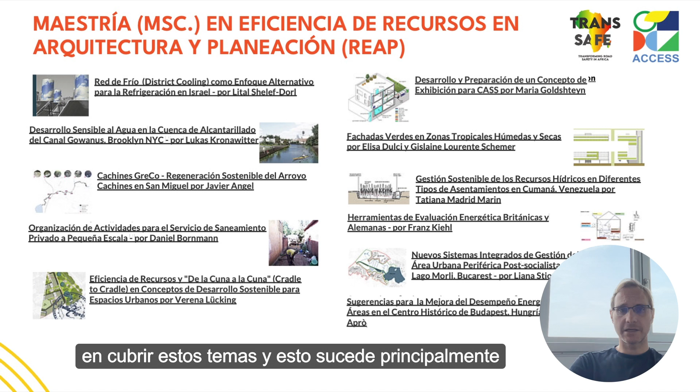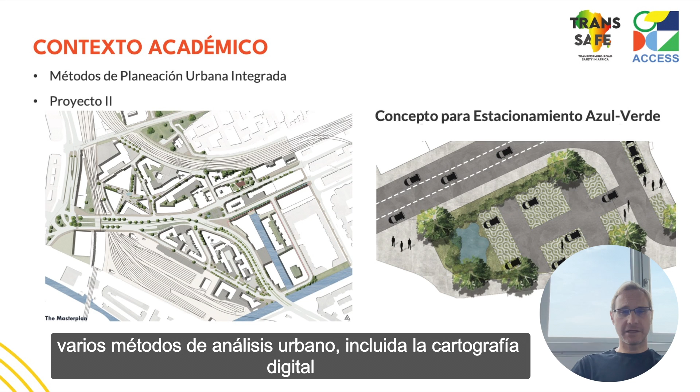But we specifically want to put an emphasis on covering these topics, and it happens mainly in two courses. The first one, Methods of Integrated Urban Planning, provides an opportunity for the students to really familiarize themselves with a variety of options in planning, including various methods for urban appraisal, including digital mapping.

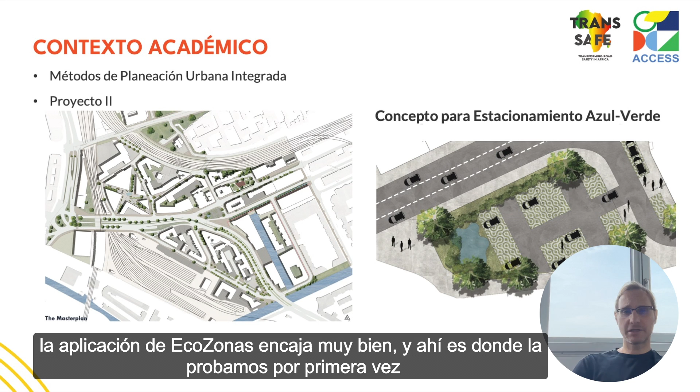So that's where EcoZones app fits very well, and that's where we actually tested it for the first time last year in 2024, when it was still in the development phase. We would surely use it in the future to help students familiarize themselves with the process and the topic.

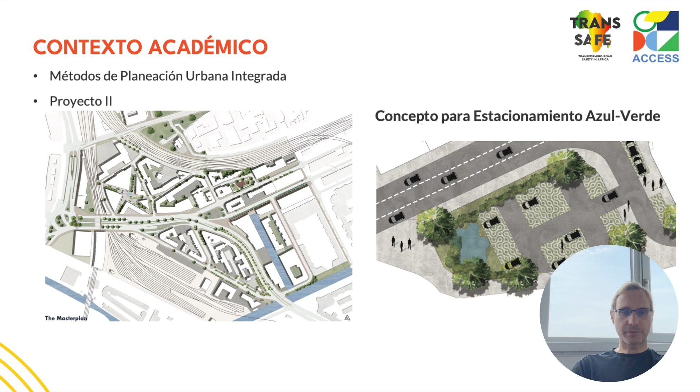Second, we also use it in project work, for instance in Project 2, which concentrates on the development of a project conceptualized by students in a specific district of Hamburg. Mobility and road safety in many cases is at least analyzed, but sometimes is even a part of these projects, and the whole process involves walkability analysis in specific districts.

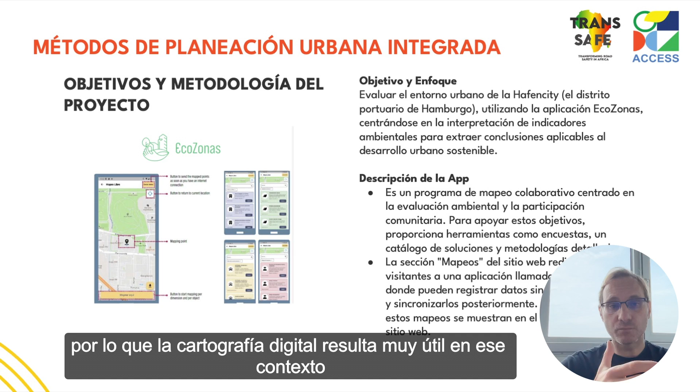So again, digital mapping comes in very handy in that context.

So what I wanted to do is just very briefly show you how one group of our students familiarized themselves with the app. They didn't really use this kind of tool in the past, so while testing it, they not only approached it from the perspective of results, but also wanted to get a sense of the broader meaning of mapping in an urban environment, and reflect a little on the whole process, not from an outsider's perspective, but zooming in and reflecting also on the utility of the approach for their goals.

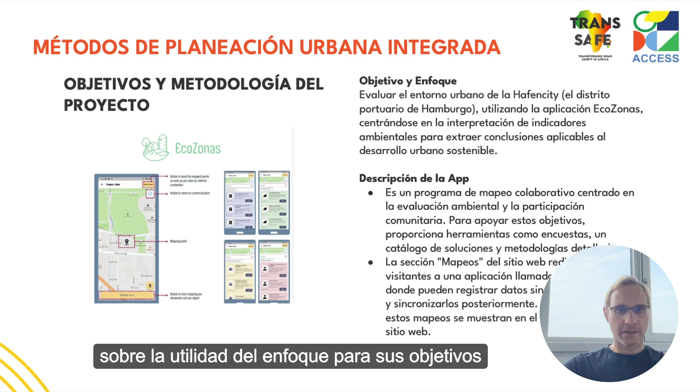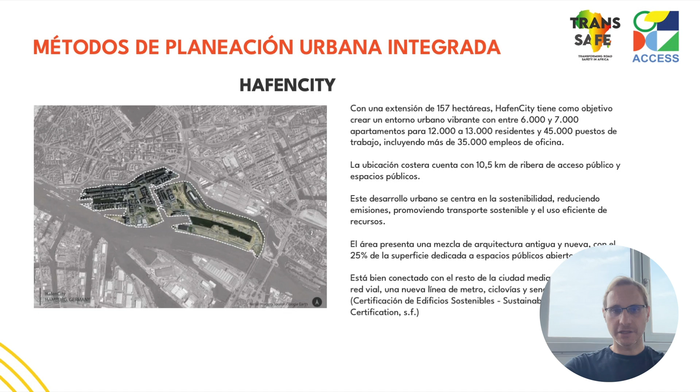This was realized in the district of HafenCity, where our university is also located, where students tried to concentrate on the various aspects that the app offers, including mobility, but also environmental quality, socio-economic well-being, and disaster risks.

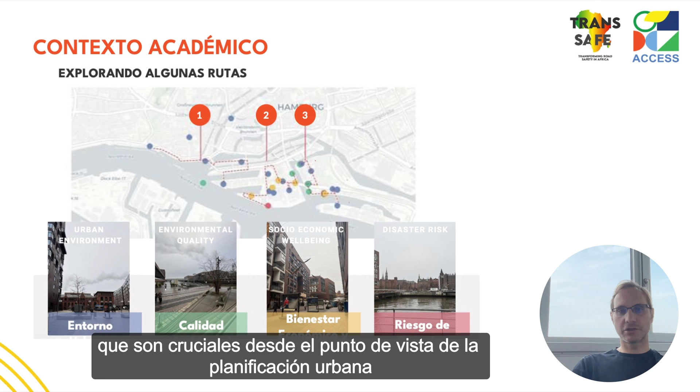They chose, as you may see on this slide, specific walks in the district rather than covering each and every street, walks which are crucial from an urban planning perspective and were the most interesting in their investigation.

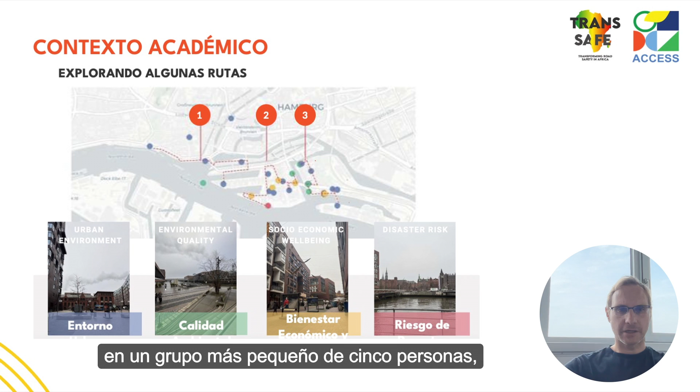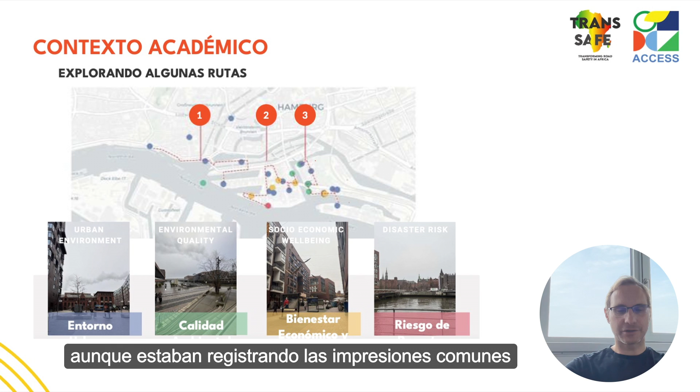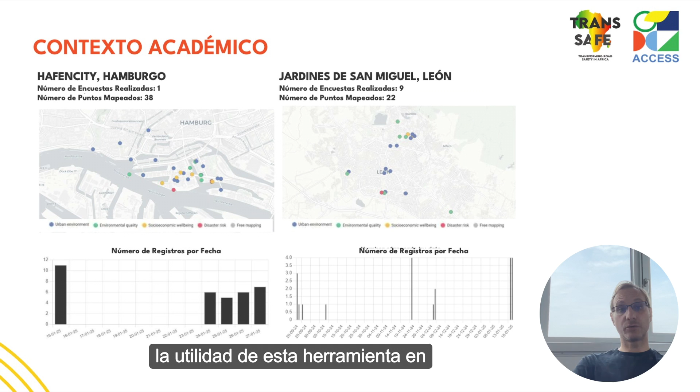They did three walks altogether in a smaller group of 5 people, using just 1 or 2 mobile phones, even though they were recording the common impressions from the ground. It was also interesting for them to compare the utility of this tool in a different context than it was originally developed.

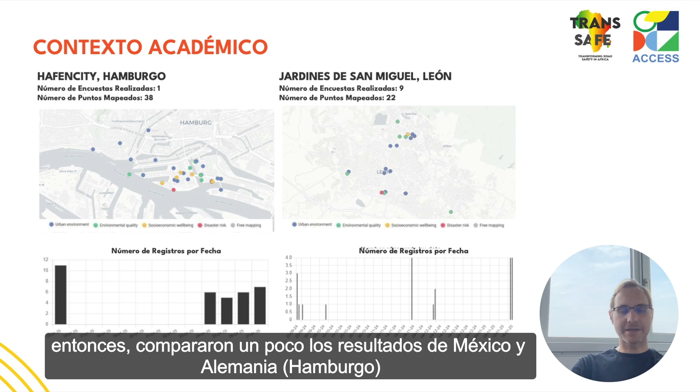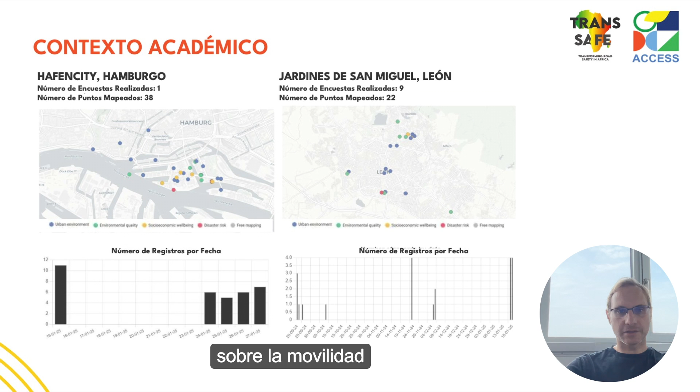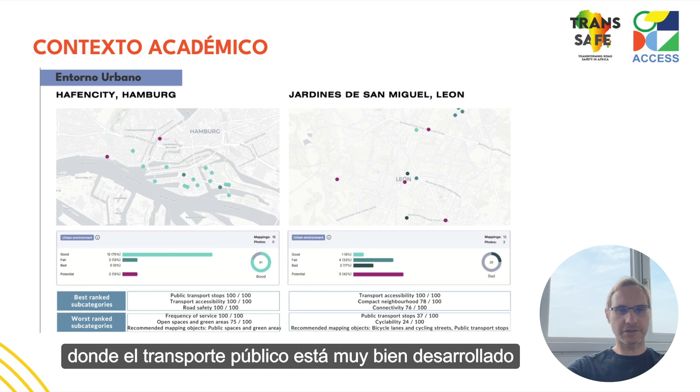Comparing a little the results from Mexico and Germany, Hamburg, with a focus on looking at the results between the two cities, the results concerning mobility were somehow more positive in the context of Hamburg, where public transportation is very well developed. But they still reflected on some ways of improving the environment, in spite of the very high scores that urban environment qualities received.

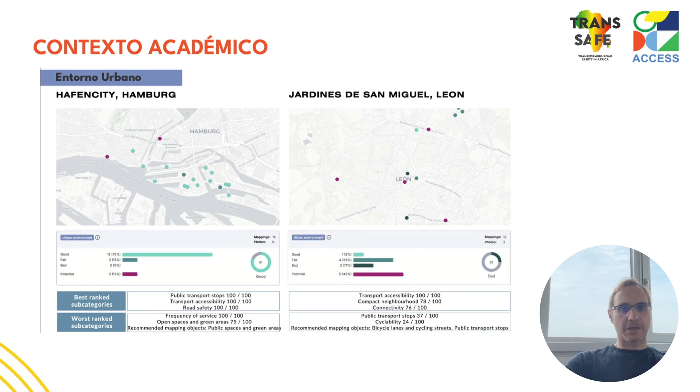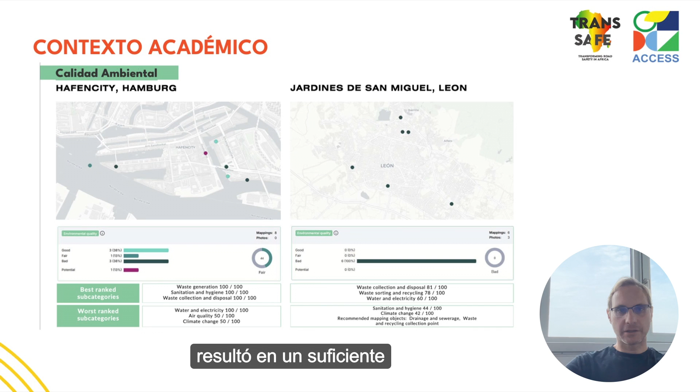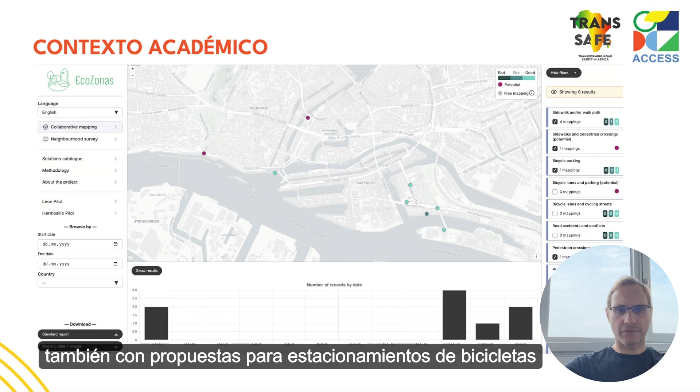As I mentioned, this was also repeated, for instance, for environmental quality, and overall resulted in quite a decent number of points and reflections, around 8 of those concerning specifically matters of mobility, also with proposals for bicycle parking spaces and improvement in the city.

So the final output, which might be somehow relevant, is that it also pushed students to think about possible solutions, which involved, in that case, parking management and shared micro-mobility services in the city.

At the end, they also evaluated how it was for them to use the app, with overwhelmingly positive feedback. But the app was still at the stage of development, so they had a small issue with the fact that not all of them could access it through their devices, because they had different mobile phones.

But as this is sorted, we will certainly encourage the next generations to use the tool and also apply it in the project work that we're doing throughout the studies. Overall, just to sum up, specifically for the students...